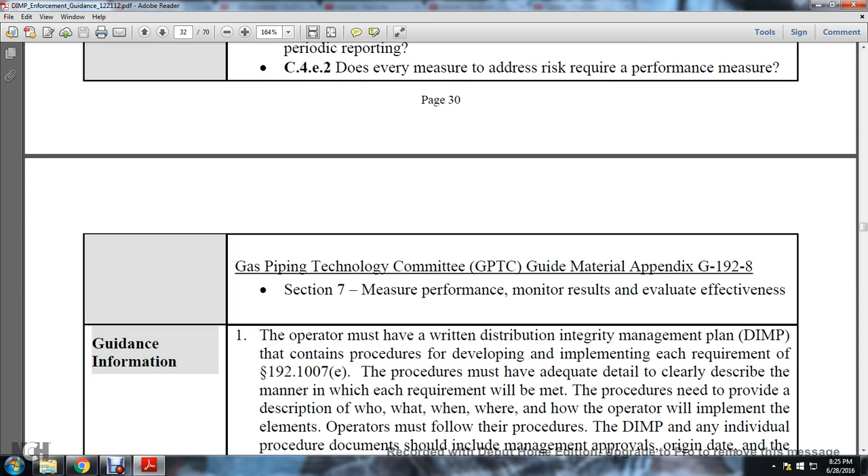Guideline. The Gas Piping Technology Committee, the GPTC Guide Material Appendix G, 192.8, Section 7: measure of performance and monitoring results, evaluate effectiveness.

Guidance information: the operator must have a written distribution integrity management plan that contains procedures for developing and implementing each of the requirements under Statute 192.1007(e).

The procedure must adequately and clearly describe the manner in which each program requirement will be met. The procedure needs to provide a description of who, what, when, where, and how the operator will implement the elements. The operator must follow the procedure of the Distribution Integrity Management Program.

Individual procedure documents should include the management approval's origin and the effective date of the last revision. For additional information, see the guidance section.

192.1005: an operator must have provisions for measuring an integrity management program, the effectiveness of the operator's management program. The documentation must identify that the measurements are to be reviewed and the frequency at which they are reviewed.

The operator must develop the monitoring of the performance from the established baseline to evaluate the effectiveness of the integrity management program.

The program documentation must include the process of the operator establishing a baseline and measurement of each performance measure from which the evaluation of change is made.

Program documentation must specify the measurements to be taken and identify the specific document dates that the measures should cover. The threat-specific measure will only apply to the operator who determines the measure needed to reduce the risk.

If it's a new performance measure, the operator may only have one data point, and will collect more data in the future to evaluate the change.

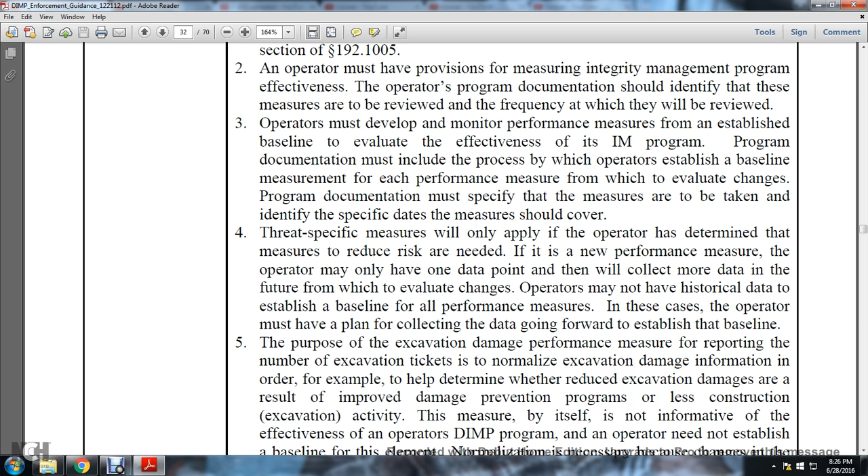The operator may not have historical data to establish the baseline for all performance measures. In those cases, the operator must have a plan for collecting data going forward to establish the baseline.

The purpose of the excavation damage performance measure is the reporting of the number of excavation tickets, to normalize the excavation damage information in order to help determine whether reduced excavation damages are a result of improved damage prevention programs or less construction excavation activity.

The measure by itself is not informative for the effectiveness of the operator's distribution integrity management program.

An operator may not need to establish a baseline for this element because normalization is necessary due to changes in the amount of construction activity, which accounts for the number of excavation damages but are outside the control of the operator's integrity management program.

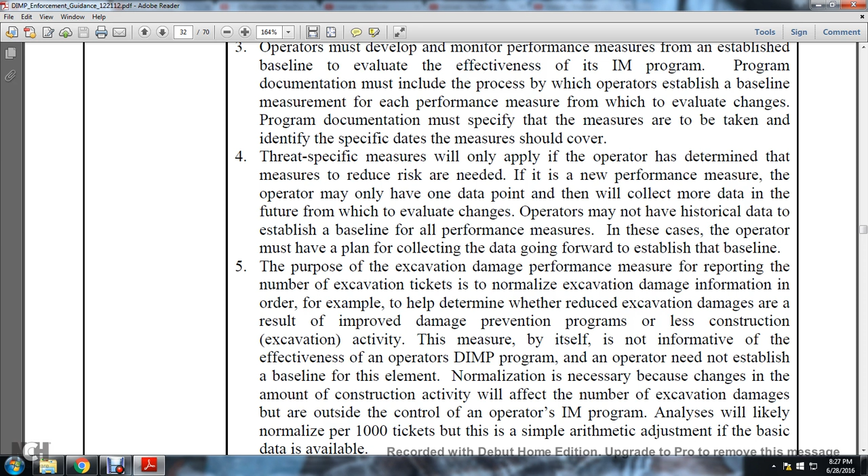Analyses will likely normalize per 1,000 tickets, but a simple arithmetic adjustment is possible if the basic data is available.

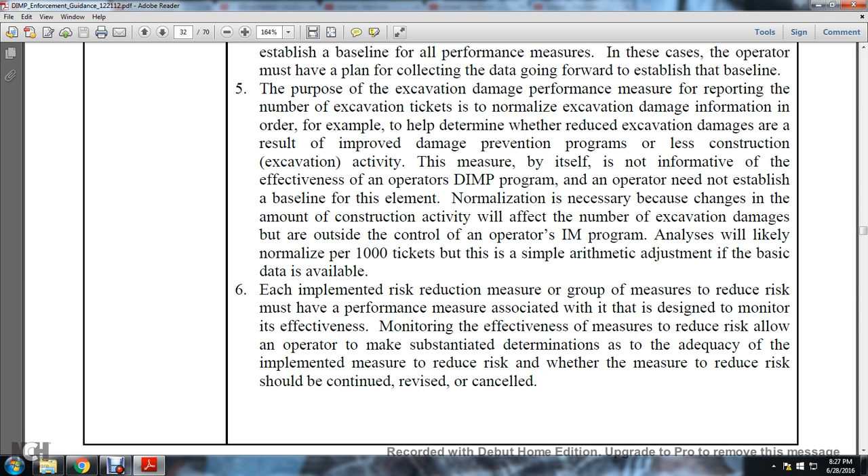6. Each implemented risk reduction measure or group of measures to reduce risk must have a performance measure associated with it, designed for monitoring its effectiveness. Monitoring the effectiveness of the measure to reduce risk allows the operator to make substantiated determinations as to the adequacy of implemented measures, and whether the measures to reduce risk shall be continued, revised, or canceled.

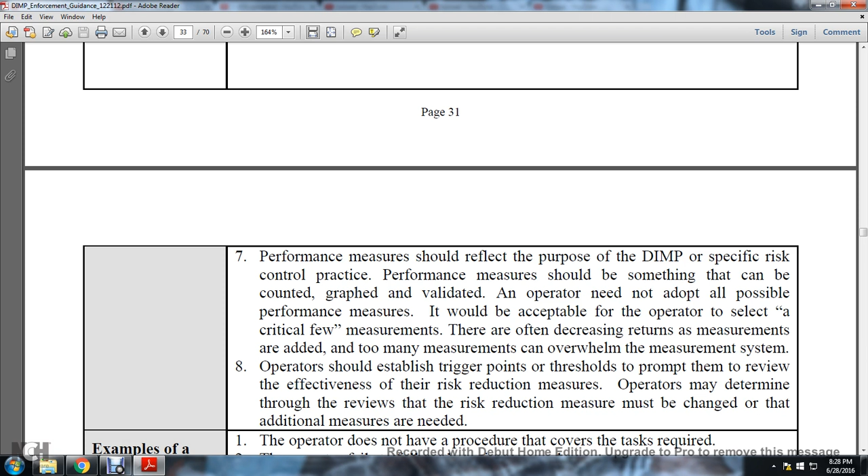7. Performance measures should be reflective of the purpose of the distribution integrity management program or specific risk control practice. Performance measures should be something that can be counted, graphed, and validated. The operator need not adopt all possible performance measures; it would be acceptable for the operator to select a critical few measurements, since adding too many measurements can overwhelm the measurement system with diminishing returns.

Operators should establish a trigger point or threshold to prompt review of the effectiveness of their risk reduction measurements. The operator may determine through these reviews that the risk reduction measurement needs to be changed, or that additional measurements are needed and implemented.

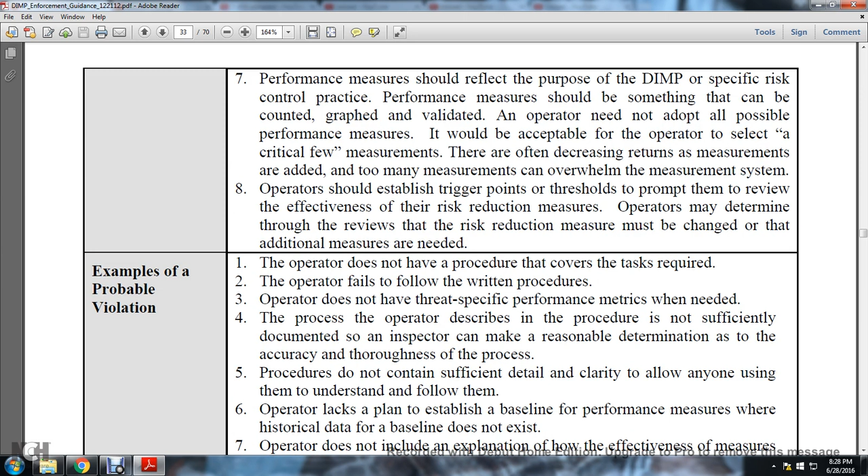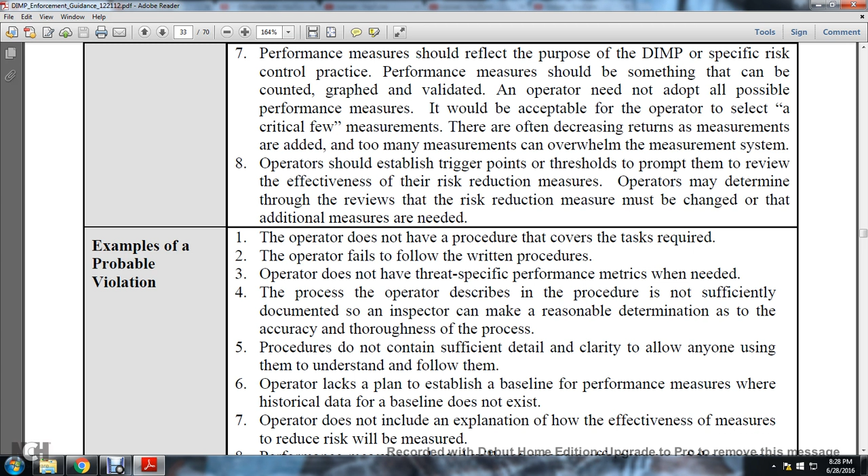Examples of probable violations: the operator does not have a procedure that covers the required task. The operator fails to follow the written procedures. The operator does not have threat-specific performance metrics that were needed. The operator's process or procedure is not sufficiently documented so that the inspector can make a reasonable determination as to the accuracy and thoroughness of the process. Procedures do not contain sufficient detail or clarity to allow anyone using them to understand and follow them.

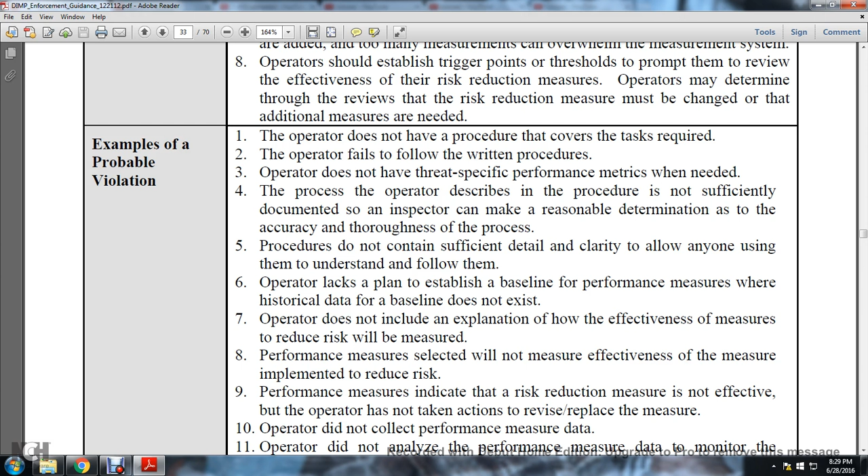6. The operator lacks a plan to establish baseline performance measures where historical baseline data does not exist. The operator does not include an explanation of how effectiveness of the measure to reduce risk will be measured. 8. The performance measure selected does not measure the effectiveness of the measure implemented to reduce risk.

9. The performance measure indicates the risk reduction measure is not effective, but the operator has not taken action to revise or replace the measure.

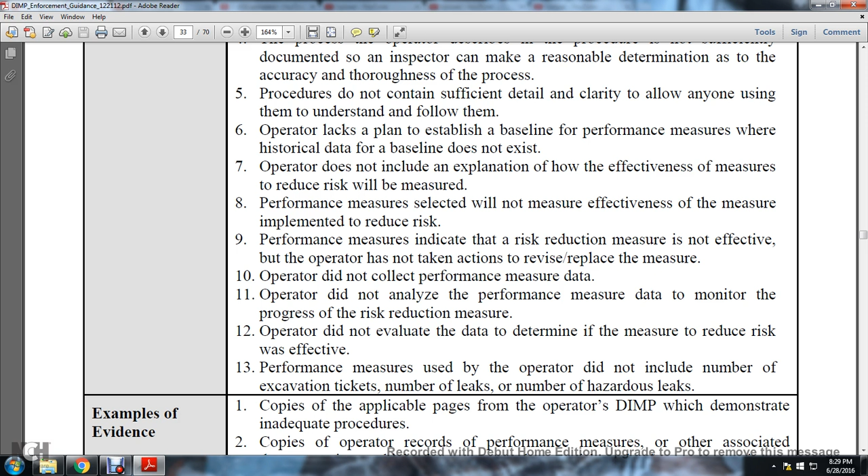The operator did not collect performance measure data. The operator did not analyze the performance measure data to monitor progress of the risk reduction system or measure. 12. The operator did not evaluate the data to determine whether the measure to reduce risk was effective. Performance measures used by the operator did not include the number of excavation tickets, number of leaks, and number of hazardous leaks.

Examples of evidence: a copy of the applicable pages of the operator's distribution integrity management program that demonstrate the inadequate process. A copy of the operator's record of the performance measure and/or associated documentation demonstrating the risk reduction measure is not effective. Copies of the operator's reports, performance measures, and/or other associated documentation which demonstrate the risk reduction measure is not effective, and that corrective actions have not been taken, documented, or demonstrated.

Meaning the operator did not collect and evaluate the performance measure data. 5. Documented photographic evidence demonstrating the violation. 6. Oral and written statements from operator personnel; other special notifications are not yet available.

Distribution Integrity Management, 192, December 21st, 2012, 192.1007(f). What are the required elements of the integrity management program? When written in existing code language, a written integrity management plan must contain the procedures for developing and implementing the following elements.

F. The periodic evaluation: the operator reevaluates the threats and risks to the entire pipeline, considering the relevance of threats in one location to other areas. Each operator must determine the appropriate period for conducting complete program evaluations based on the complexity of the system and changing factors affecting the risk of failure. The operator must conduct a complete program reevaluation at least every 5 years. The operator must consider the results of performance monitoring in these evaluations.

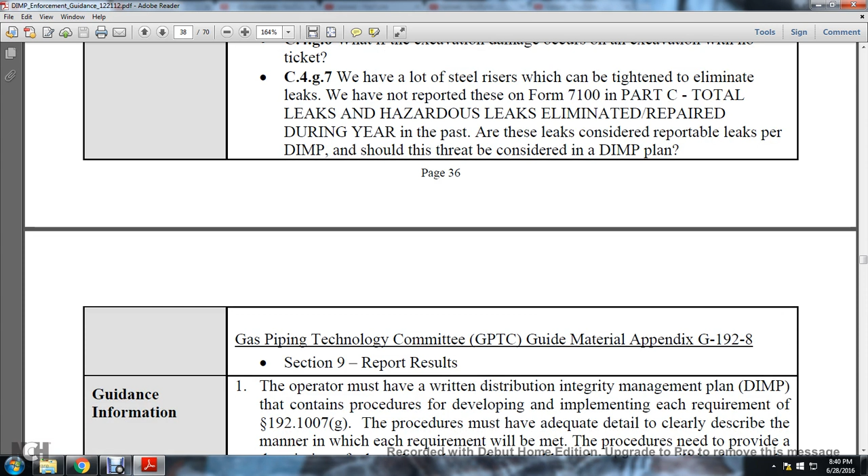Other materials and sources: Gas Piping Technology Committee Guide, Appendix G-192-8, Section 9, Report Results.

The operator must have a written distribution integrity management plan that covers the procedures for developing and implementing the requirements of statute 192.1007(g). The procedure must have adequate detail to clearly describe the manner in which the requirement will be met, providing a description of who, what, when, where, and how.

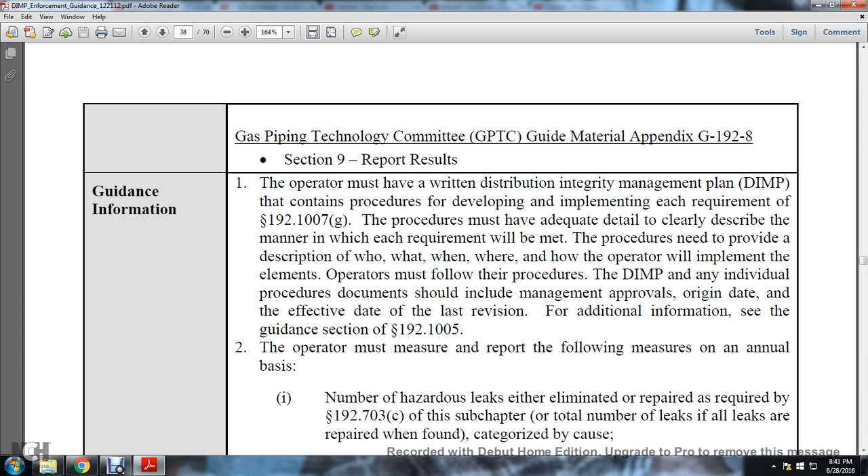The operator will implement the elements and must follow the procedures. The distribution management program and individual procedures documented should include management approval of the origin date and the effective date of the last revision, for additional information see the guidance of section 192.1005.

The operator must measure and report the following measures on an annual basis: first, the number of hazard leaks either eliminated, repaired, or required under 192.703C of the subchapter; and the number of leaks repaired when found, categorized by cause.

Second, the number of excavation damages. Third, the number of excavation tickets received and information by the underground facility operator, by notification center. Fourth, the total number of leaks eliminated or repaired, categorized by cause.

Third, evidence that the appropriate regulatory authority has been notified in accordance with the various requirements of the rule must be obtained. The operator's method of notification should be apparent. The use of electronic notification is preferred, and therefore such electronic records are acceptable.

Examples of probable violations: the operator does not have a procedure that covers the task being performed. The operator fails to follow the written procedure. The operator did not submit the required supporting performance measures. The operator's procedure did not include all measures specified by the rule. The operator failed to submit the required report on an annual basis pursuant to statute 191.11.

Examples of evidence: a copy of the operator's procedure showing that it does not meet the specified requirements, documented photographic evidence demonstrating the violation described, and documented oral and written statements from the operator's personnel demonstrating that required reporting was not performed in a timely manner. Other types of special notifications not so far available.

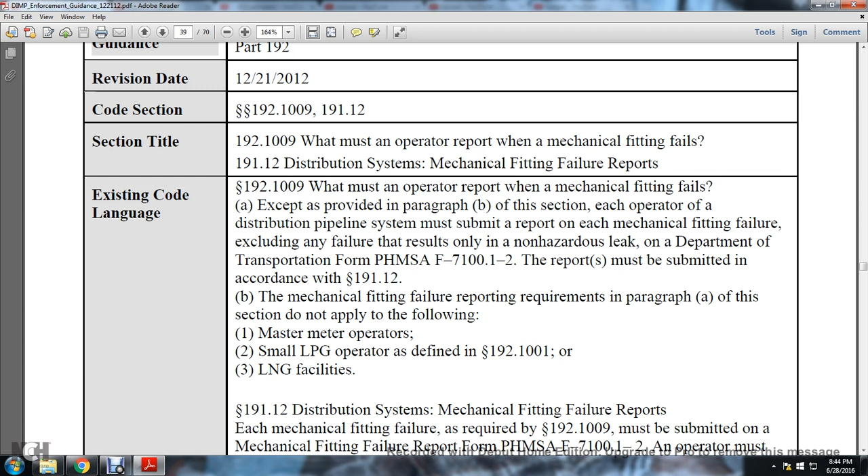191-12: The mechanical fitting failure reporting requirements of paragraph A of this section do not apply to master meter operators, small liquid petroleum gas operators as defined in statute 192.1001, and liquefied natural gas facilities.

191.12, Distribution Systems Mechanical Fitting Failure Reports. Each mechanical fitting failure required under statute 192.1009 must be submitted on the mechanical fitting failure form, PHMSA F7100.1-2.

The operator must submit a mechanical fitting failure report for each mechanical fitting failure that occurs within the calendar year, not later than March 15th of the following year. For example, the mechanical failure report for calendar year 2011 must be submitted no later than March 15, 2012. Alternatively, the operator may elect to submit reports throughout the year.

In addition, the operator must also report the information to the state pipeline safety authority or state authority with regulatory authority over the operator's pipeline.

Origin of code: 192-116, 76 FR 5494, February 1st, 2011. The origin of the code is the same as the last amendment.

Interpretation summary is not yet available. Advisory bulletin alert: Notice of advisory bulletin 1207, issued June 11, 2012.

The Pipeline and Hazardous Materials Safety Administration is issuing an advisory bulletin to provide clarification to owners and operators of gas distribution pipeline facilities when complying with the mechanical fitting failure form, PHMSA F7100.1-2.

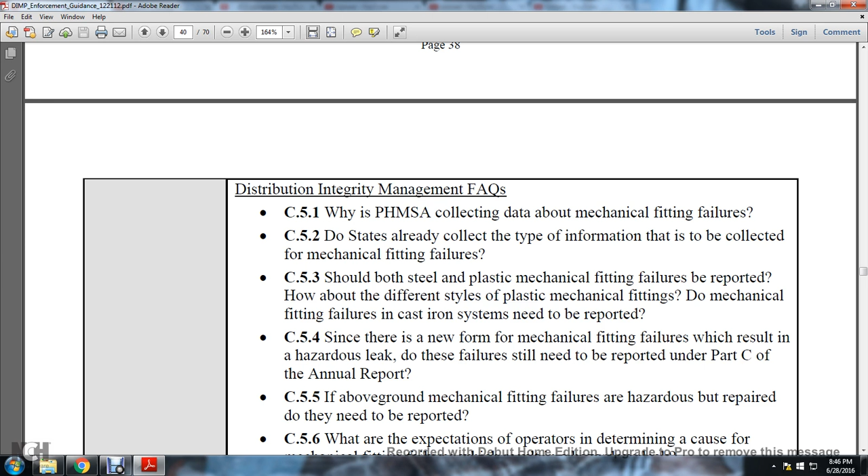C52: Does the state already collect the type of information that is to be collected on mechanical fitting failures? C53: Should both steel and plastic mechanical fitting failures be reported? Do the different styles of plastic mechanical fittings and mechanical fitting failures in cast iron systems need to be reported?

C54: Since there is a new form for mechanical fitting failures which result in hazardous leaks, does the failure still need to be reported in Part C of the annual report?

If above-ground fitting failures are hazardous but repaired, do they need to be reported? C56: What are the exemptions or expectations for the operator to determine the cause of a mechanical fitting failure which results in a hazardous leak?

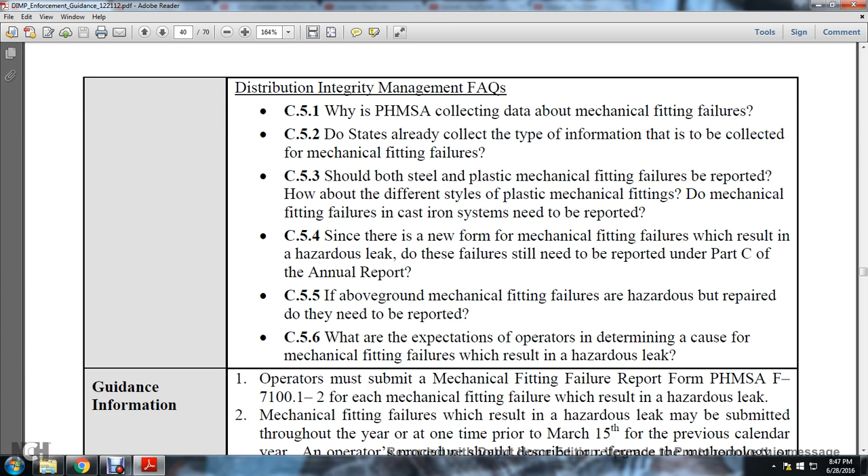Guidance information: Operators must submit a mechanical fitting failure report on the PHMSA F7100.1-2 for each mechanical fitting failure which results in a hazardous leak.

Mechanical fitting failures which result in a hazardous leak may be submitted throughout the year, or at one time, prior to March 15th of the following calendar year. An operator's procedure should describe or reference the methodology and process used to collect mechanical fitting failure data and for submission.

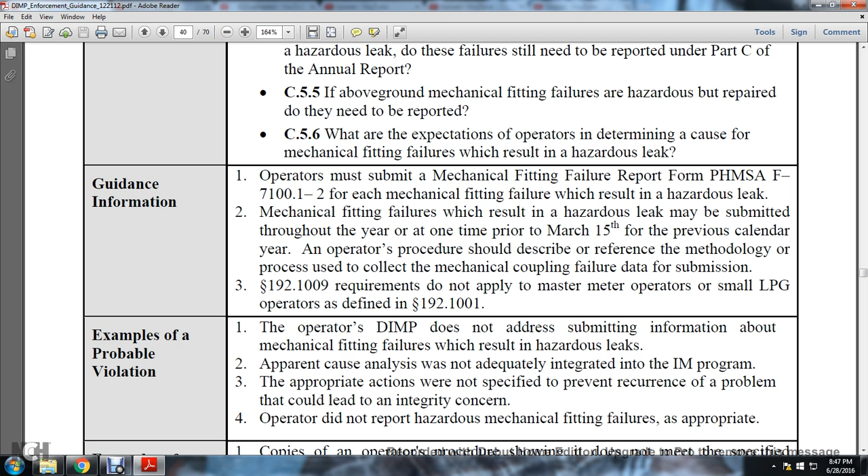Statute 192.1009 requirements do not apply to master meter operators and small liquid petroleum gas operators as defined in Statute 192.1001.

Appropriate actions were not specified to prevent reoccurrence of the problem, which could lead to an integrity concern. The operator did not report hazardous mechanical fitting failures as required, or as appropriate.

Examples of evidence: 1. Copies of an operator's procedure showing that it does not meet the specified requirements. 2. Documented photographic evidence demonstrating the violation. 3. Documented oral or written statements from operating personnel. 4. Records identifying mechanical fitting failures resulting in hazardous leaks that were not included in the reporting performed by the operator, or other specific notifications.

Enforcement guidelines, distribution integrity management, Part 192, revision date December 21st, 2012. Code section 192.1011: what records must an operator keep?

Under the existing code, an operator must maintain records demonstrating compliance with the requirements of the subpart for at least 10 years. The record must include copies of the superseded integrity management programs developed under the subpart.

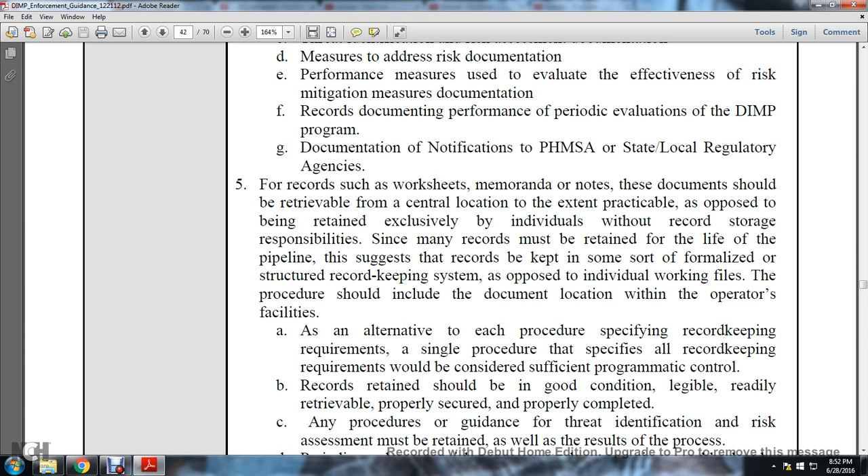The suggestion is to maintain some sort of formalized or structured recordkeeping system as opposed to individual practices. Procedures should include the documented location of the operator facility. As an alternative to each procedure specifying recordkeeping requirements, a single procedure that specifies all recordkeeping requirements is considered sufficient programmatic control.

Records retained should be in good condition: legible, readily retrievable, properly secured, and properly completed. Any procedures and guidance for threat identification and risk assessment must be retained, as well as the results of the process.

Periodic updates of risk assessment documentation would be expected in the program files, including supporting records such as meeting minutes and subject matter expert reviews where conclusions are drawn.

Example of a probable violation: procedures do not require that all required records be retained with the 10-year minimum requirement. The operator does not have a procedure specifying that copies superseded with the integrity management plans will be maintained for at least 10 years.

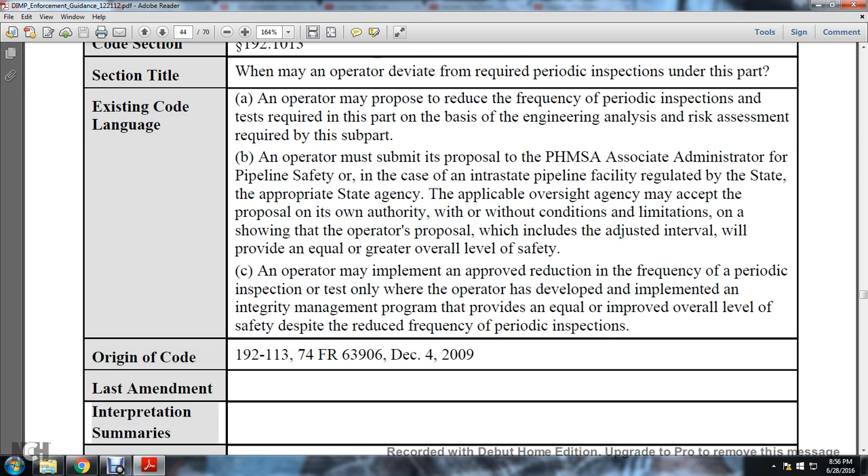An operator may implement a reduced frequency of periodic inspection tests only with an integrity management program that provides an equal or improved overall level of safety despite the reduced frequency of periodic inspection.

Original code 192.113, 74 FR 63906, December 4th, 2009. Last amendment not foreseeable and not done.

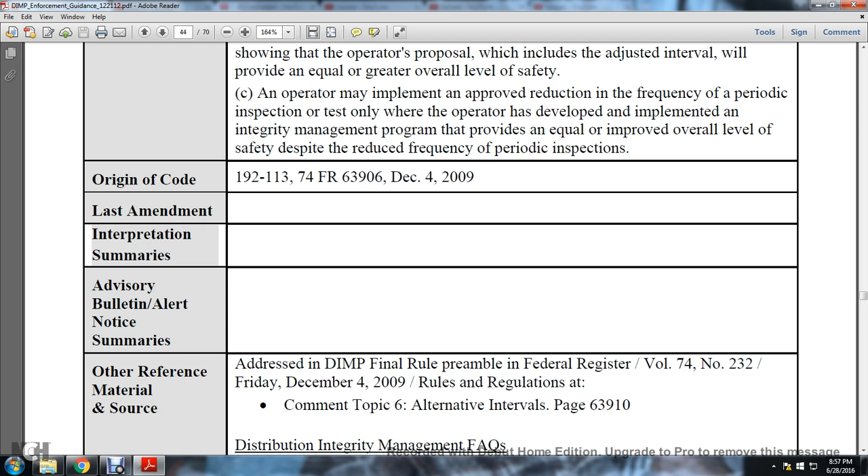Interpretation summaries, notice advisory bulletin, or notice summaries: blank. Other reference materials addressing the distribution integrity management final rule and preamble: Federal Register Volume 74, Number 232, Friday, December 4th, 2009, rules and regulations, comment topic 6, alternative intervals, page 63910.

Distribution integrity management frequently asked questions. C71: how can an operator use the distribution integrity management program to justify reductions of periodic test inspection requirements? C72: what will PHMSA (or States) require for proposals for alternate inspection intervals?

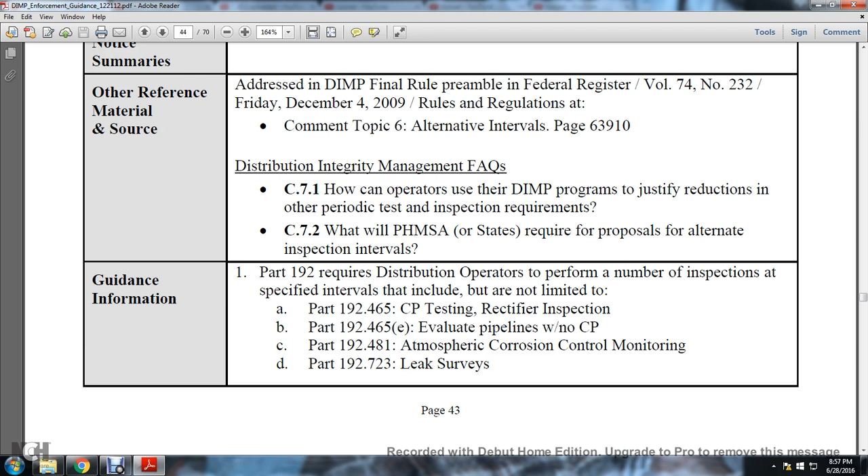Guidance information: Part 192 requires distribution operators to perform a number of inspections at specified intervals, including but not limited to 192.465 CP testing and rectifier inspection, 192.465(e) evaluated pipelines with no CP, 192.481 atmospheric corrosion control monitoring, 192.723 leak surveys, 192.739 pressure limiting device testing, 192.747 emergency valve testing, 192.749 vault inspection, and 192.721 main patrolling.

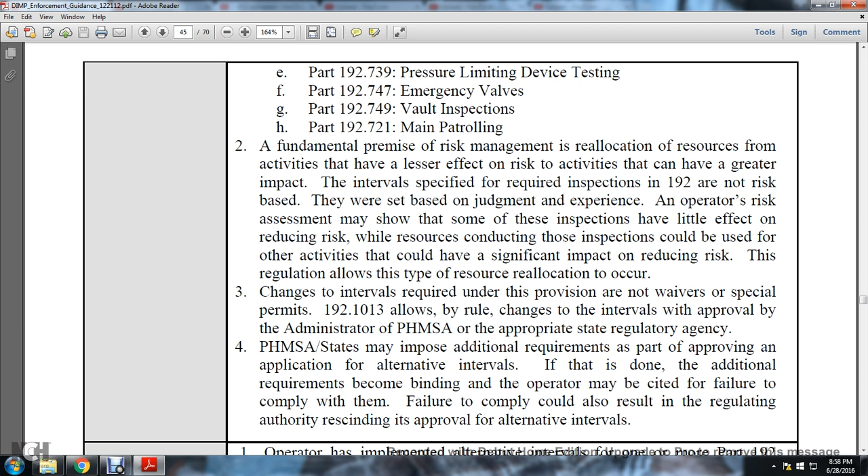Through the fundamental premise of risk management, reallocation of resources for activities with less risk effect to activities with greater impact makes sense. The intervals specified for required inspection under 192 are not risk-based; they are based on judgment and experience. A risk assessment may show that some inspections have little effect on reducing risk, while resources used for those inspections could be reallocated to other activities that significantly reduce risk. The regulation allows this type of resource reallocation to occur.

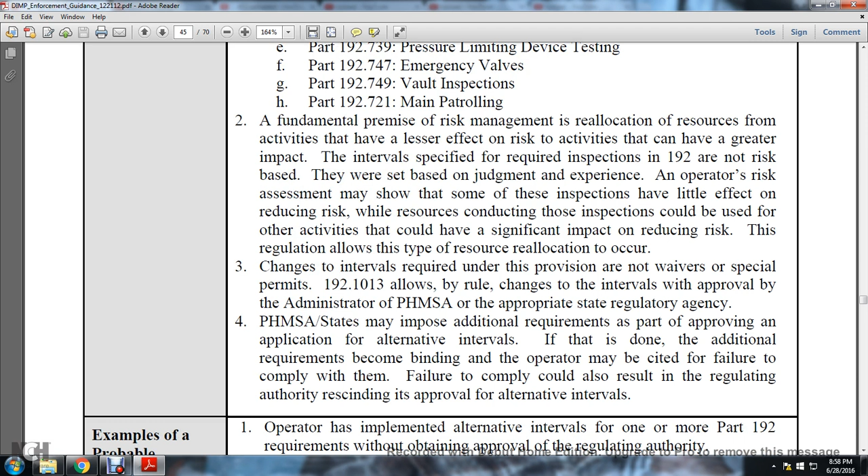The change in intervals required under the provision are not waivers or special permits. 192.1013 allow rules to change the intervals with approval of the Pipeline and Hazardous Materials Safety Administration or the appropriate state regulatory agency.

The Pipeline and Hazardous Materials Safety Administration or states may issue additional requirements as part of approving an application for alternative intervals. If done, these additional requirements become binding, and the operator may be cited for failure to comply with them. Failure to comply could also result in the regulating authority rescinding approval of the alternative intervals.

Examples of probable violation: an operator proceeds with alternative intervals for one or more Part 192 requirements without obtaining approval of the regulating authority. Or, the operator is conducting required inspections at an interval that differs from the alternative interval approved by the regulating authority.

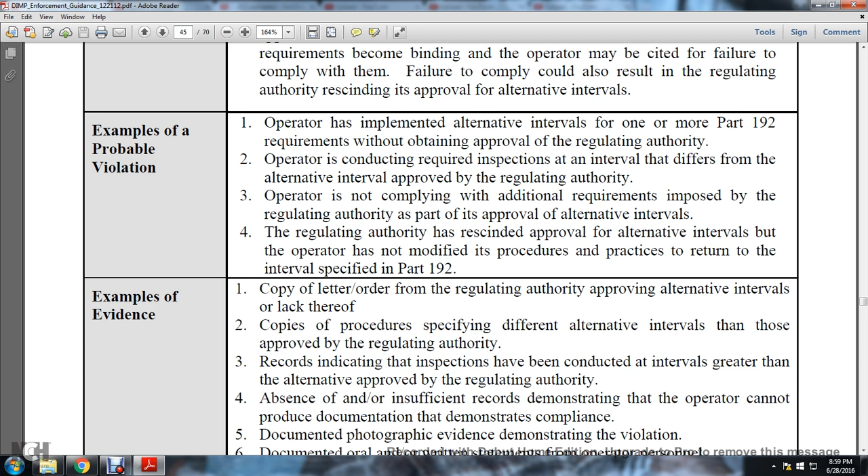More examples of probable violation: the operator is not complying with additional requirements imposed by the regulating authority as part of the approval of alternative intervals. Or, the regulating authority has rescinded approval for the alternative intervals and the operator has not modified its procedures and practices to return to the intervals specified in Part 192.

Examples of evidence: a copy of the letter from the regulating authority approving alternative intervals, or lack thereof; a copy of the procedure specifying different alternative intervals than those approved by the regulating authority; records indicating inspections conducted at intervals greater than the alternative approved by the regulating authority; absence or insufficient records demonstrating the operator cannot produce documentation that shows compliance; documented photographic evidence demonstrating the violation; documented oral and written statements by operating personnel; and other specifications not so far noted.

Distribution Integrity Management, Part 1 and 2, Enforcement Guidance, Revision Date December 21st, 2012. Code Section 192.1015(a). Section title: What must a master meter or small liquid petroleum gas operator do to implement this subpart? Existing code: generally, no later than August 2nd, 2011, the operator of a master meter system and the small liquid petroleum gas operator must develop and implement...

...an integrated management program that includes the written integrity management program specified in paragraph B of the section. The integrity management program for the pipeline should reflect the relative simplicity of these types of pipelines.

Origin of code: 192.1015, 74 FR 63906, December 4th, 2009. Last amendments and interpretations, summaries, advisory bulletins, and alerts are blank. Other resource materials addressing the distribution integrity management program: final rule published in the Federal Register, volume 74, number 232, Friday December 4th 2009, rules and regulations, comment topic 7 - integrity management requirements for master meter, liquid petroleum gas operators, pages 63911-63912; comment topic 11 - required documentation, page 63915.

Distribution integrity management frequently asked questions: B41 - what is a SHRIMP, simple and handy risk-based integrity management plan? B42 - is there a threshold size of the operator's distribution system above which the SHRIMP tool should not be used for a simple and handy risk-based integrity management program? B43 - will my plan be compliant with using the SHRIMP simple and handy risk-based integrity management program?

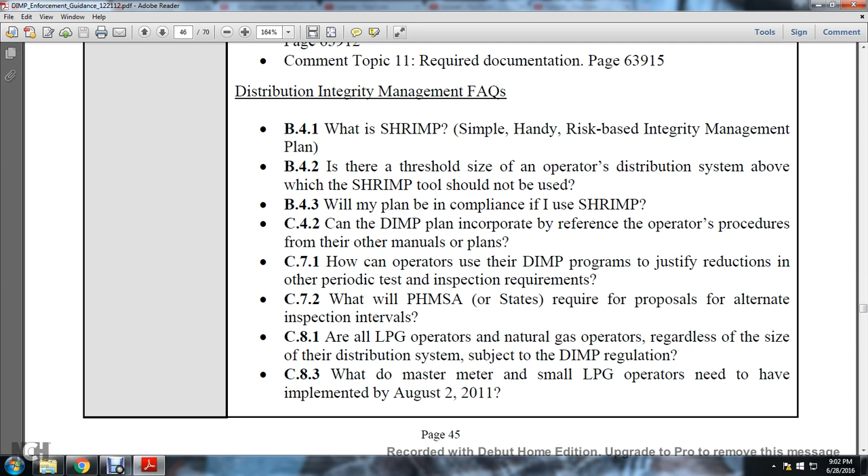C42 - can a distribution integrity management plan incorporate by reference the operator's other procedures, manuals, and plans? C71 - can an operator use the distribution integrity management program to justify reductions in other periodic test and inspection requirements? C72 - what will PHMSA or the states require for the proposed alternative inspection intervals?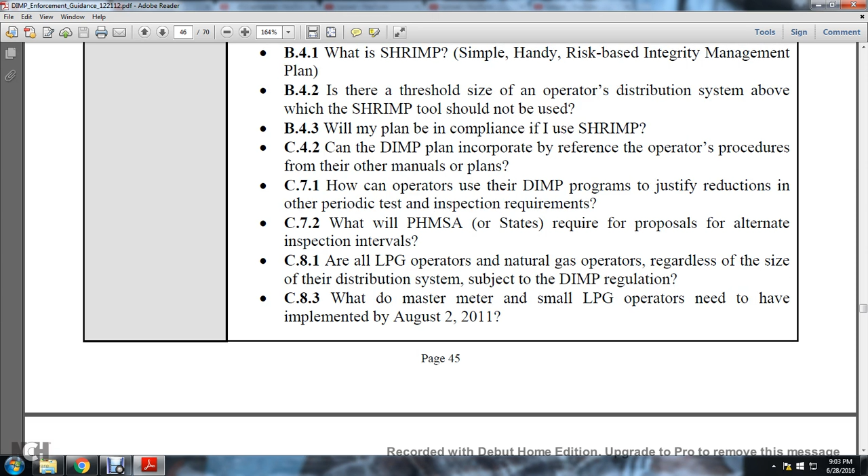C81 - all liquefied petroleum gas operators and natural gas operators regardless of the size of the distribution system are subject to the distribution integrity management program regulations. What do master meter and small liquid petroleum gas operators need to have implemented by August 2011?

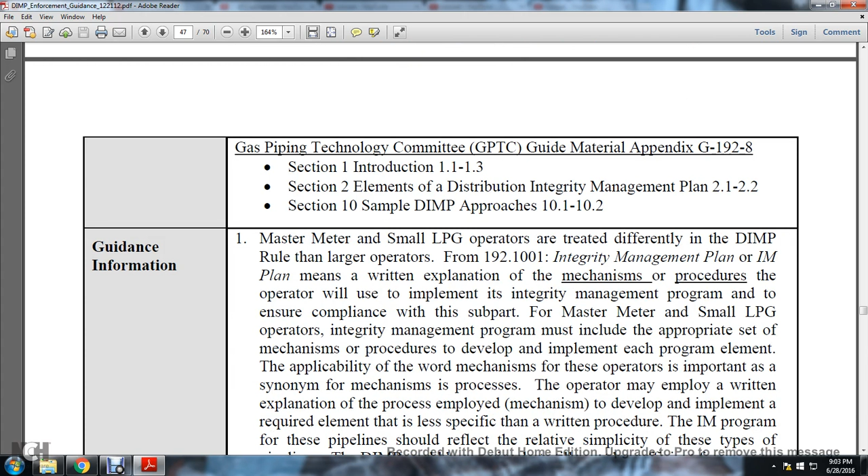Gas Piping Technology Committee, or GPTC, Guide Material Appendix G-192-8, Section 1, Introduction, 1.1 through 1.3; Section 2, Elements of Distribution Integrity Management Plan, 2.1 and 2.2; Section 10, Sample DIMP Approaches, 10.1 and 10.2.

Guidance information: master meter and small liquid petroleum operators are treated differently in the distribution integrity program rule than larger operators. From 49 CFR 192.1001, integrity management, and the integrity management program plan requires a written explanation of the mechanisms and procedures operators will use to implement the integrity management program and ensure compliance. For master meter and small liquid petroleum gas operators. The integrity management program must include the appropriate set of mechanisms and procedures developed and implemented for each program element.

The applicability of the word 'mechanism' for the operator is important, as a synonym for mechanism is process. The operator may employ a written explanation of the process or mechanism used to develop and implement the required element, less specific than a written procedure. The integrity management program for these pipelines should reflect the relative simplicity of these types of pipeline.

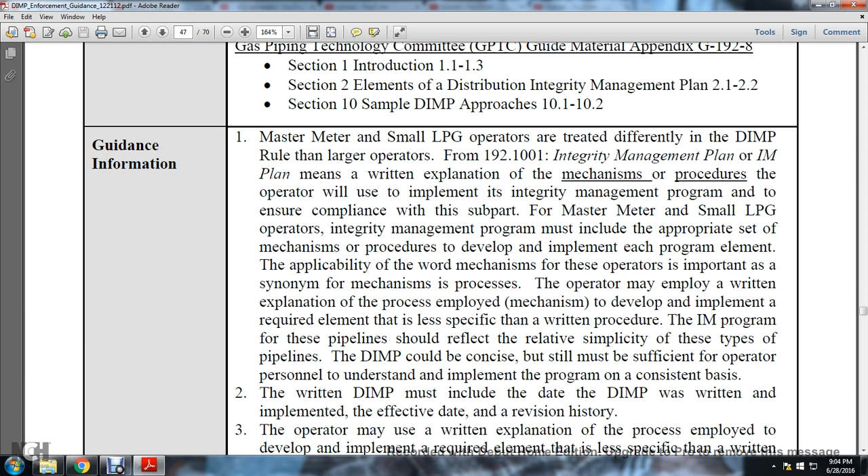Distribution integrity management can be concise, but it must still be sufficient for the operator's personnel to understand and implement the program on a consistent basis. The written distribution integrity program must include the date the program was written and implemented, with an effective date and revision history.

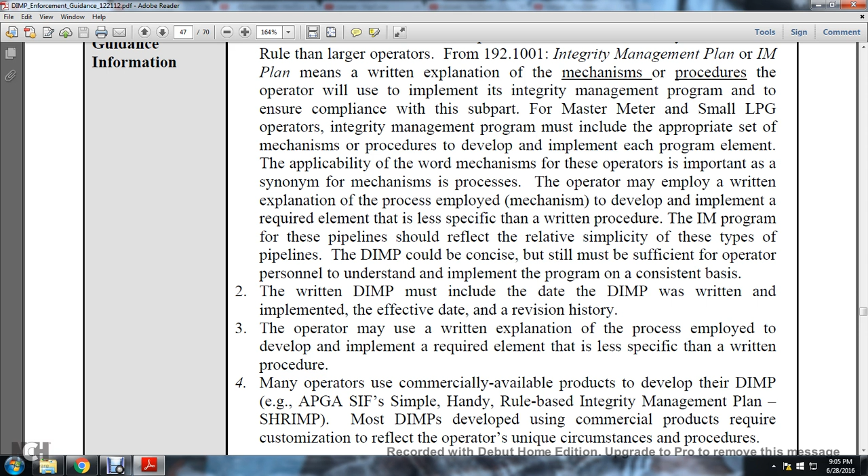The operator may use a written explanation of the process employed to develop and implement the required element, less specific than a written procedure. Many operators use commercially available products developed for distribution integrity management programs, such as APGA SIF's SHRIMP - the simple and handy risk-based integrity management plan. Most distribution integrity management programs developed using commercial products require customization to reflect the operator's unique circumstances and procedures.

Guidance specific to the operator who transferred the pipeline to another operator, but retains responsibility by contract, for maintenance and distribution integrity management activities.

Which operator is accountable for implementing the distribution integrity management programs? OPS and the States inspect operators for compliance with the pipeline safety regulations. An operator is defined in Title 49 CFR

192.3 as the person who engages in the transportation of gas. The person is further defined as an individual, firm, joint venture, partnership, corporation, association, state, municipality, cooperative association, joint stock association, including trustee or receiver, assignee, or personal representative thereof.

If an operator retains responsibility for operation maintenance activities, including integrity management, the operator must comply with the distribution integrity management program.

Example of a probable violation: the operator does not have the distribution integrity management program written and implemented by August 2, 2011. The operator does not address the liquid petroleum gas or other type of gas transported when applicable, causing ambiguity and confusion as to the type of pipeline system the distribution integrity management program addresses.

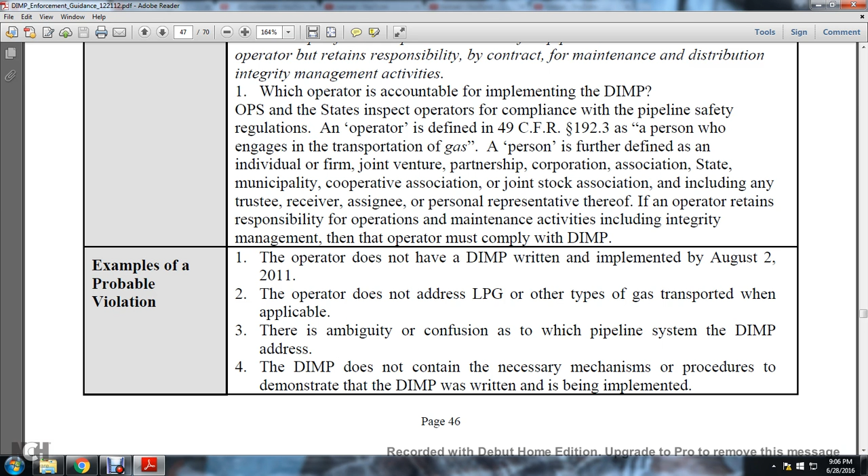The distribution integrity management program does not contain the necessary mechanisms and procedures to demonstrate that the written program is implemented. Fifth, the distribution integrity management does not include all pipelines and appurtenances.

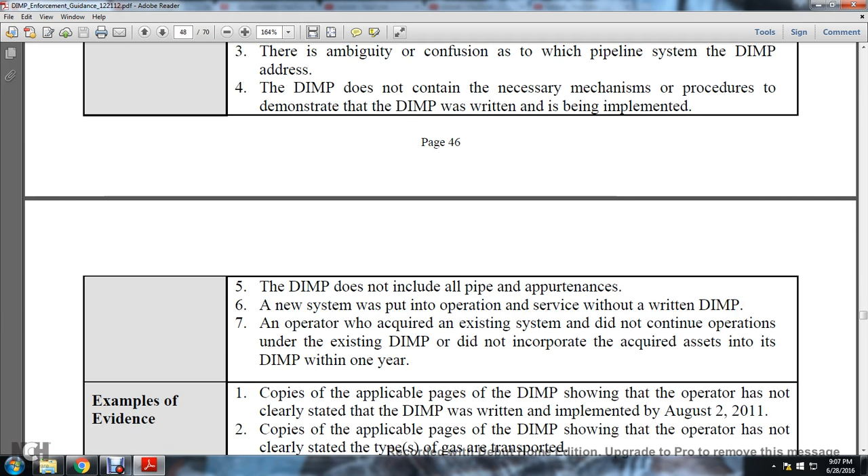Probable violation six: a new system was put into operation service without a written distribution integrity management program. Seven: an operator who acquired an existing system did not continue operations under the existing distribution integrity management program, or did not incorporate the acquired assets into the distribution integrity management program within one year.

Examples of evidence: copies of applicable pages of the DIMP showing the operator has not clearly stated the distribution integrity management program was written and implemented by August 2nd, 2011. Copies of applicable pages showing the operator has not clearly stated the type of gas that's transported.

Third, copies of applicable pages of the distribution integrity management program showing the operator has not clearly stated what system the distribution integrity management covers. Documented photographic evidence demonstrating the violation. Documented oral or written statements from the operator personnel. Other special notifications noted.

Enforcement guidance, distribution integrity management, part 192, December 21st, 2012, section 192.1015(b)(1). Section title: what must a master meter or small liquid petroleum gas operator do to implement this subpart? Each operator's written integrity management program must address, at minimum, the following elements.

One, knowledge: the operator must demonstrate knowledge of the pipeline, which, to the extent known, should include the approximate location and material of the pipeline. The operator must identify additional information needed and provide a plan for gaining that knowledge over time through normal activities conducted on the pipeline, for example design, construction, operation, and maintenance activities.

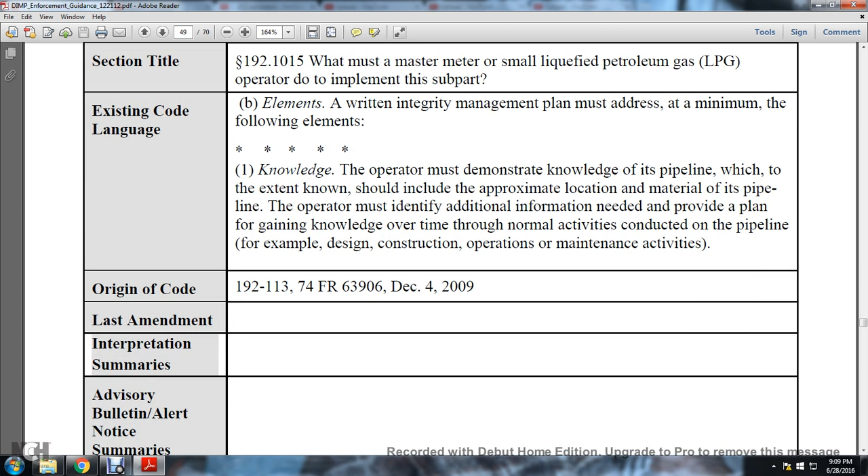The originating code is 192-113, 74 Federal Register 63906, December 4th, 2009.

Last amendment interpretation summaries, advisory bulletins, alerts, and summaries, and other materials and sources addressed in the distribution integrity management final rule preamble, Federal Register volume 74, number 232, Friday, December 4th, 2009, rules and regulations, comment topic 20: knowledge of the pipeline enforcement factors, page 63919.

Distribution integrity management frequently asked questions. C4A1: the rule requires the operator to know the system, but must an operator excavate simply to gather information on parts of the system where it may not have complete knowledge? C4A2: there are some characteristics of an operator's system that may not be known during the development of an integrity management plan.

C4A4: what data is required to be collected for new gas pipelines going into the ground? C4A5: what comprises reasonable, reliable information? C4A6: most operating plans include the source of demonstrating and understanding of the gas distribution system. The Gas Piping Technology Committee Guide Material, Appendix to G192, Section 3, knowledge.

Master meter and small liquid petroleum gas operators are treated differently in the distribution integrity management program rule than large operators. From 192.1001, integrity management program means a written explanation of mechanisms and procedures the operator will use to implement the integrity management program to ensure compliance with the subpart for master meters.

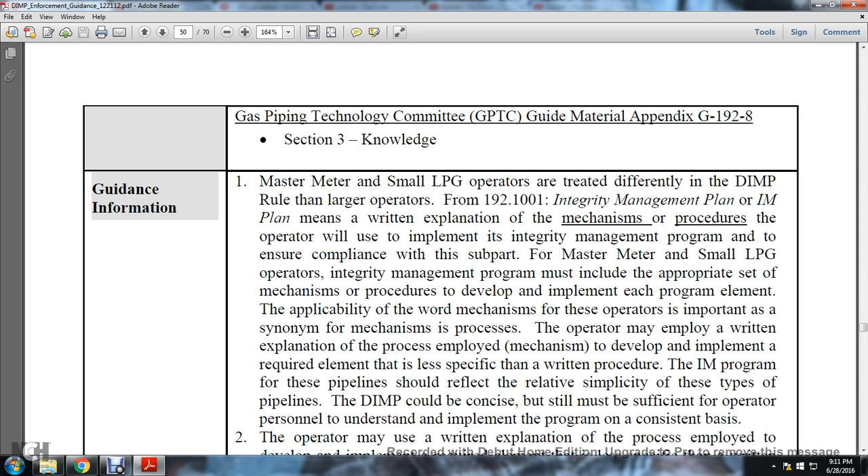Mechanisms to develop and implement the required elements are less specific than written procedures for the integrity management program, reflecting the relative simplicity of these types of pipeline. The distribution integrity management program could be concise, but still must be sufficient for the operator's personnel to understand and implement the program on a consistent basis.

The operator may use a written explanation process employed with developing and implementing required elements that is less specific for the written procedure.

An operator must have knowledge of the gas distribution system, including but not limited to: location, material composition, pipe size, joint method, construction method, date of installation, soil condition, and when appropriate, the operating and design pressures, history, operating experience, performance data, condition of system, and any other characteristic relevant to the operation.

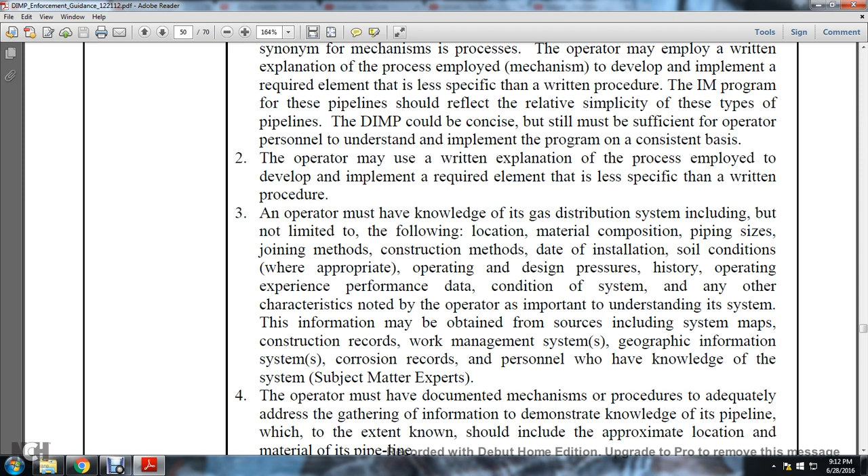Understanding the system is important. This information may be obtained from sources including system maps, construction records, work management systems, geographical information systems, corrosion records, and personnel who have knowledge of the system, such as subject matter experts.

The operator must have a documented mechanism or procedure to address other information demonstrating knowledge of the pipeline, which at minimum should include the approximate location and material of the pipeline.

The operator must identify the additional information needed to provide a plan to gain knowledge over time through the normal activities conducted on the pipeline, for example, design, construction, operation, and maintenance activities.

The Distribution Integrity Management Program must list the names of the operator-specific information sources, not generic terms such as O&M documents. Some historical data may no longer be applicable to the current condition of the pipeline.

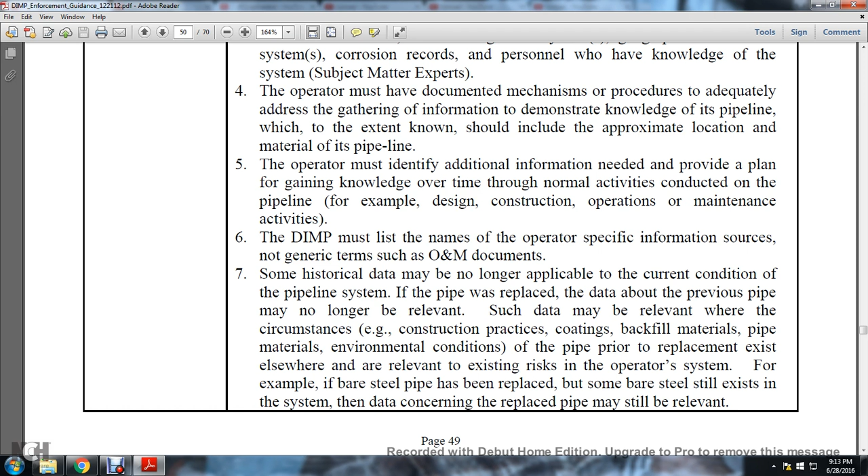For example, if bare steel has been replaced but some bare steel still exists, sometimes the data concerning the replaced pipe may still be relevant.

Operators transporting gases other than natural gas need to include in the Distribution Integrity Management Program how the characteristics of the gas impact, threats, and risks, including the differences in natural gas.

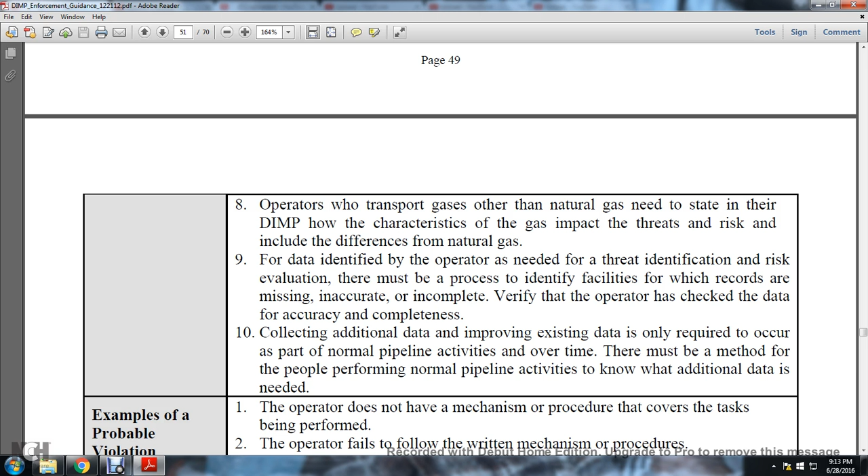For the data identified, the operator needs a threat identification and risk evaluation process to identify facilities where records are missing, inaccurate, or incomplete, and to verify that the operator checks the data for accuracy and completeness.

Technically, collecting additional data and improving existing data is required to occur through normal pipeline activities over time. There must be a method for the people performing normal pipeline activities to determine when additional data is needed.

Examples of probable violations: first, the operator does not have a mechanism or procedure for the task being performed. Second, the operator fails to follow the written mechanisms or procedures.

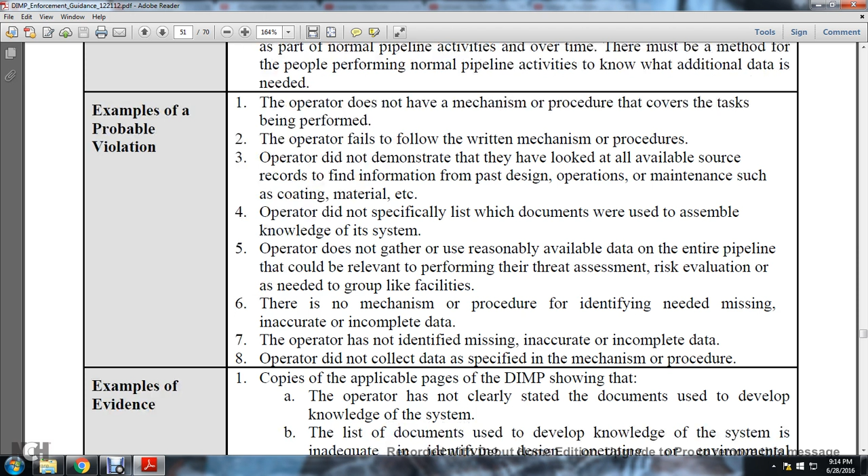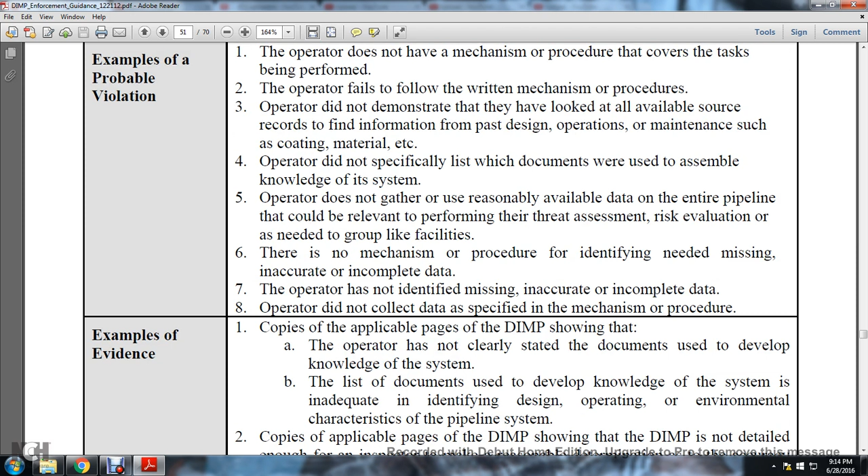Sixth, there is no mechanism or procedure to identify missing, inaccurate, or incomplete data. Seventh, the operator has not identified missing, inaccurate, or incomplete data, and did not collect data as specified in the mechanism or procedures.

Number eight: examples of evidence include copies of the applicable pages of the Distribution Integrity Management Plan as follows.

First, the operator has not clearly stated or documented the use of developing knowledge of the system. The list of documented use of developed knowledge of the system is inadequate in identifying the design, operating, and environmental characteristics of the pipeline system.

Second, the copies of the applicable pages of the Distribution Integrity Management Plan are not detailed enough for an inspector to make a reasonable determination as to the accuracy and thoroughness of the process.

Third, copies of the applicable pages of the operator's integrity management program showing records, regulations, and provisions documented with the records and other documentation are insufficient to prove compliance with the integrity regulation provisions.

Fourth, copies of the applicable pages of the operator's Distribution Integrity Management Plan showing the required data collection or utilization of data is not in distribution integrity management.

Fifth, documented photographs as evidence demonstrating the violation. Sixth, documented oral or written statements from operator personnel. Other specifications not noted.